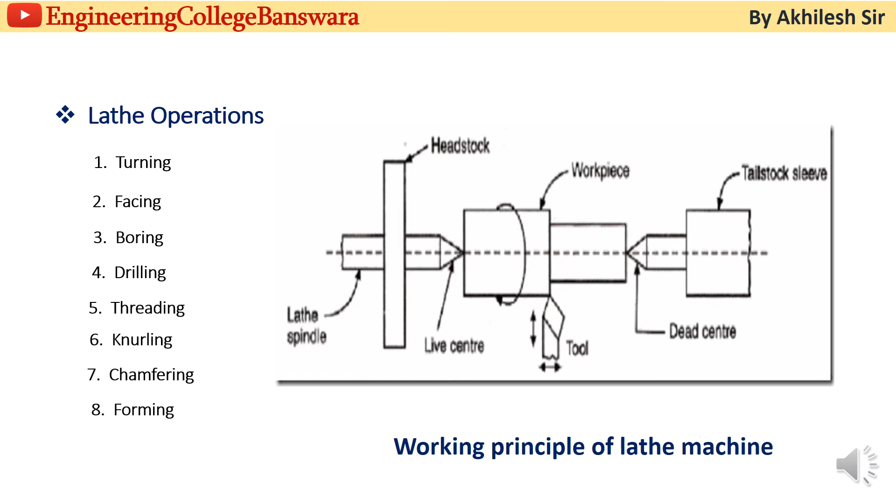Repeated cuts might be necessary to obtain a desired reduction of size. A final finishing cut might be given to the workpiece with a low depth of cut and feed but high speed to attain the desired degree of surface finish.

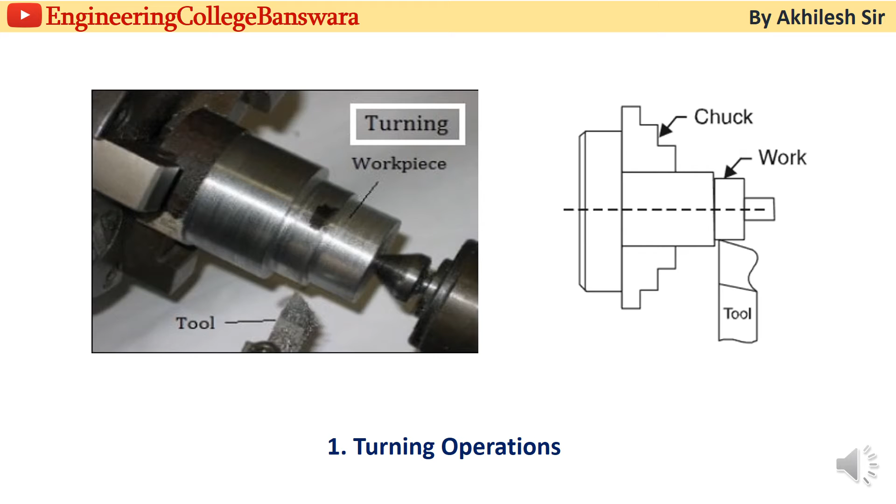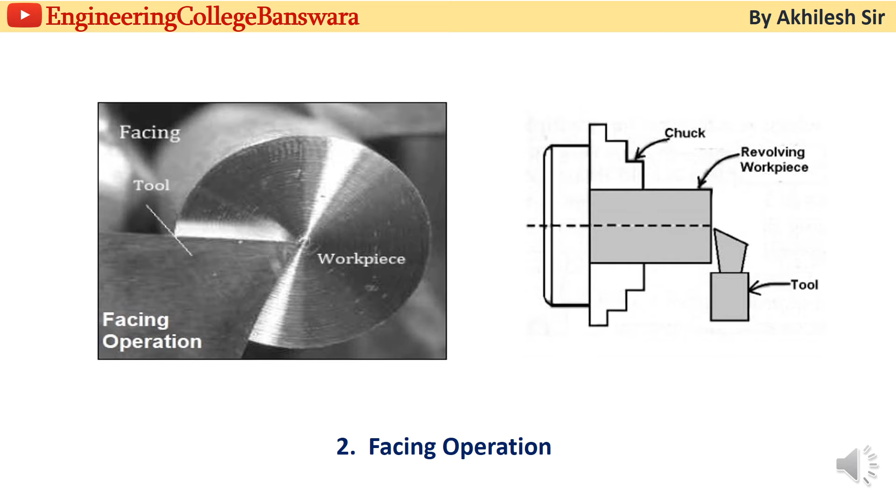Facing operation. Facing is an operation used to produce a flat surface at right angle to the rotation axis of the job. In this case, the tool is fed at right angle to the job with the depth of cut provided by the axial motion of the carriage. The job might be held in a chuck or between centers. In the center, about half of the front cone is removed to give access to the tool.

Boring operation. Boring is the process of enlarging a hole produced by drilling, casting, punching, or forging with the help of a single point tool. Boring cannot originate a hole. In boring, the job is held in a chuck or face plate and a boring tool held on the tool post is fed into it.

The operation is similar to external turning in that the feed and depth of cut are given by the longitudinal and cross motions of the tool respectively, since the enlarged hole is being generated with the motion of the workpiece and an axial motion of the tool.

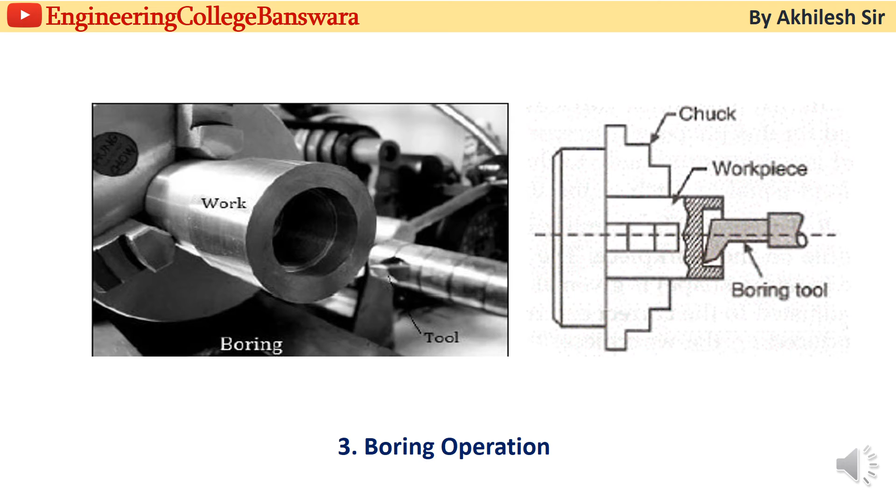Drilling operation. The workpiece is held in a chuck or on a face plate and the drill is held in the tailstock quill or drill chuck held in the quill. The taper in the quill ensures that the axis of the drill is concentric with the rotational axis of the spindle. Feeding is done by movement of the tailstock quill. Reamers, counterbores and other cutting tools may also be used similarly in place of the drill.

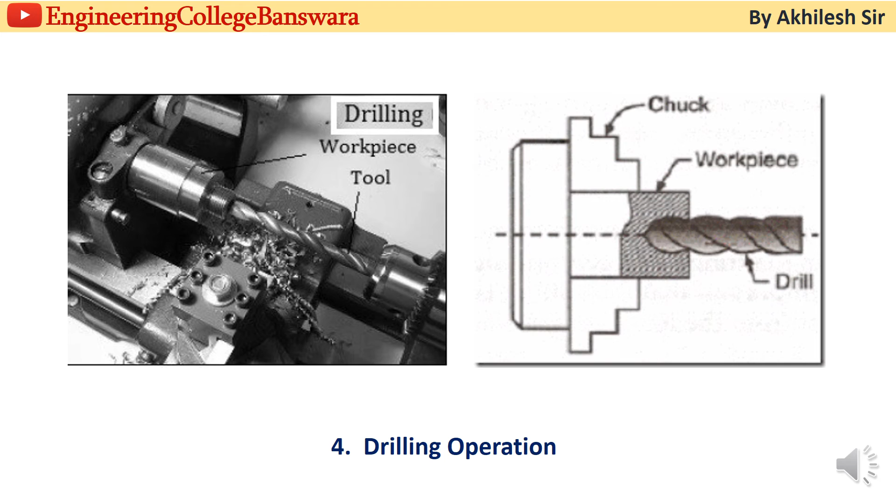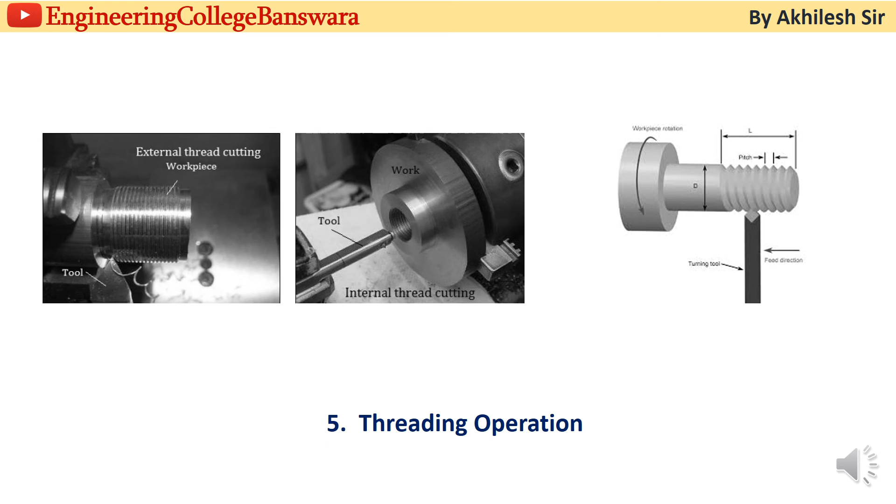Threading operation. Threading is nothing but cutting a helical groove on a workpiece. Threads may be cut either on the internal or external cylindrical surface. A specially shaped cutting tool, known as thread cutting tool, is used for the purpose. Thread cutting in a lathe is performed by traversing the cutting tool at a definite rate in proportion to the rate at which the work revolves.

Knurling operation. Knurling is the process of embossing a diamond-shaped pattern on the cylindrical surface of a workpiece. Knurling is done on the workpiece so that it does not slip when held and operated by hand. The workpiece is supported in the chuck, but since quite heavy forces are involved in the knurling process, additional support is generally provided at the free end with the tailstock center.

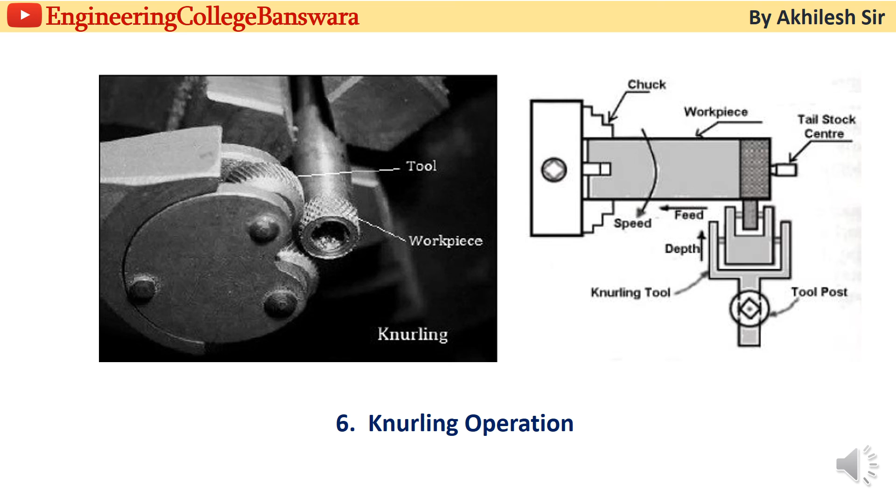Chamfering operation. Chamfering is the process of beveling the extreme end of a workpiece. It is done to remove the burrs, to protect the end of the workpiece from being damaged and have a better look.